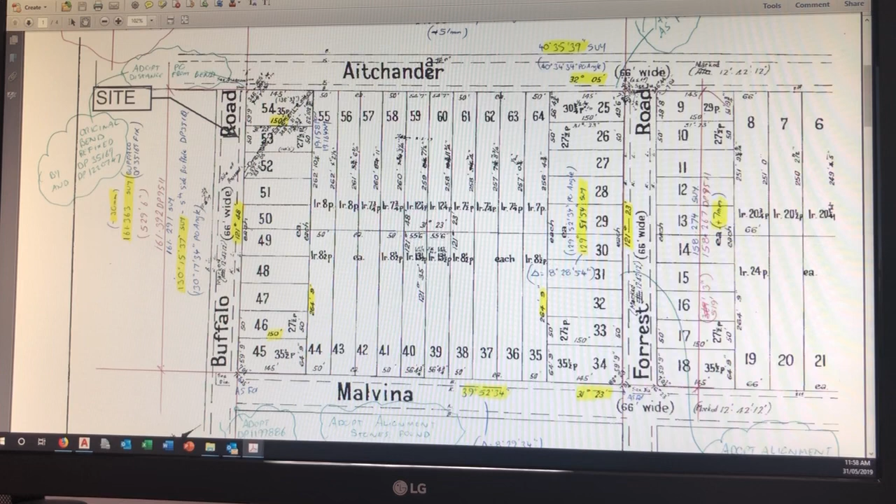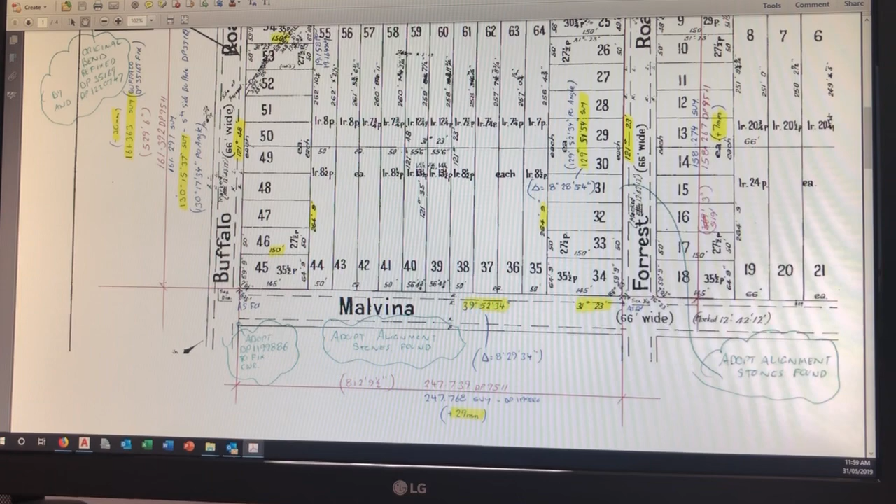Nice. And when we did a comparison from the alignment stones in Malvina up to Aitchander Street, if you look over here, we had 7 millimetres difference in distance to the original survey. When we surveyed from Forest down to Buffalo for the original alignment stone, we had 29 mil excess based on the million series plan here, but to the actual face of the stone was within 5 mil. So we've got a survey that's over 100 years old, and we're getting within 10 mil agreement to them.

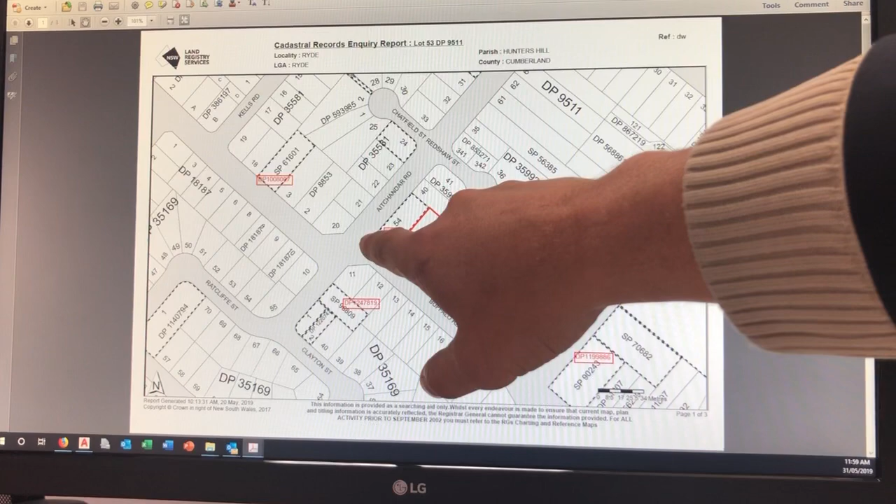Now this also just goes to why it's good to walk around and just have a look at your surroundings. You might find things, while someone's giving you plans or a search. You might imagine if we find a nail at the corner of the boundary of 50 and 49, or we find 2 concrete nails at the splay of 54. What happens if you come and find an alignment stone down here and an alignment stone around the back? It's good just to keep your wits about you.

Yeah, and the other thing we're going to bring up is generally you find million series plans, you hope you can trust them and they're great. We're just trying to say, look, that may not always be the case. This plan that's up to the northwest of us, the 100-8077 plan, it's shocking. Well, look at it, not shocking. So this is the plan that they've done.

We're on the corner on the right-hand side of the page. If you go up Aitchander, he found the alignment stone and did a lot of survey, and he's surveyed a long way. He's come down Aitchander, he's come down his property, and he's basically gone to the northwest, left-hand side, found lots of marks, lots of bends in the road. We're just looking at the Aitchander boundary. He started up the top of the screen, he's found some reference marks, found the alignment stone, pushed that bearing on.

As you come down the street, he found a peg 100mm clear, a brick wall 200mm clear, another wall 200mm clear. If we do the maths, and he's got an SSM and he's connected that into the intersection of the roads, if you do the maths from his block of land back to that SSM connection, he's 100mm long on the first dock, 170mm long here, so he's 270 long. He's then short about 150mm, so to here he's gone about just over 100mm long to the intersection.

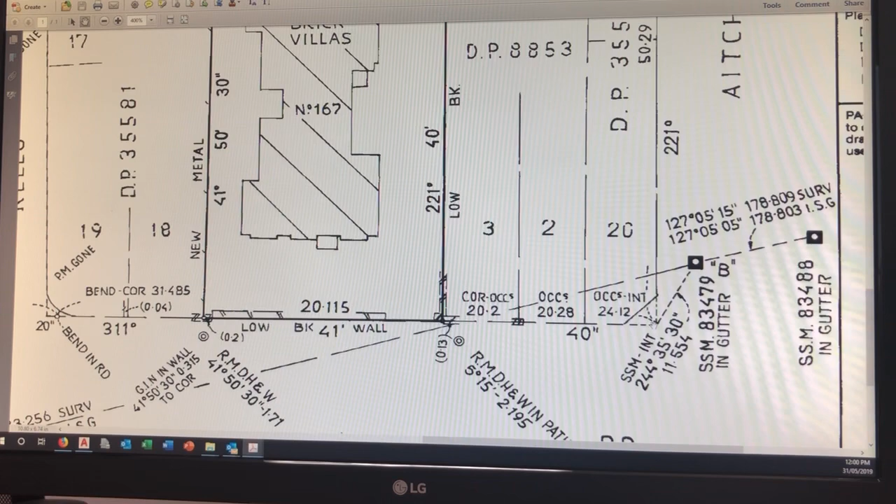If you came back title distance, that peg would be on the boundary and these occupations would be so much closer. So even though you've got a million series plan, if they've got a connection from an SSM to a corner, you can't blindly trust it. You've got to just question, what have they done? Have they done the right thing or the wrong thing? I'd hope most of the time they've done the right thing. But the important thing is to question it.

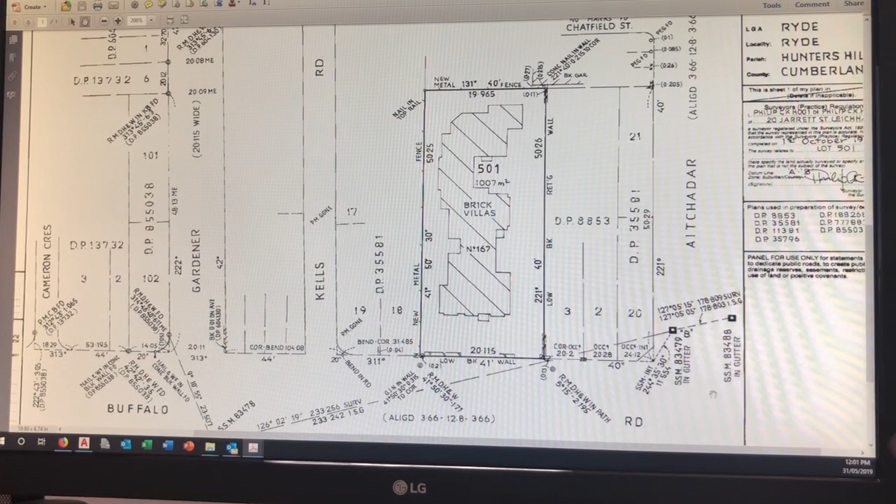So just a couple of things I want to go track back there. You said they pushed it through. So up the top here, they've come off an alignment stone, a concrete block, and a drill hole and wing. Now he hasn't come off this SSM because he's got by me, so he's used that concrete block and that drill hole and wing and this alignment stone to create a line and then pushed it through.

Now reasonably that distance there is the same as that distance there, so that's 250 metres, that's 250 metres. If that's half of it, 120 metres, so a 120 metre definition, he's then pushed that over essentially 3 times the difference. So if that's out by 30mm, or his survey of this alignment stone's out 30mm, or the concrete block's out 30mm, that makes essentially 100mm when you get down here.

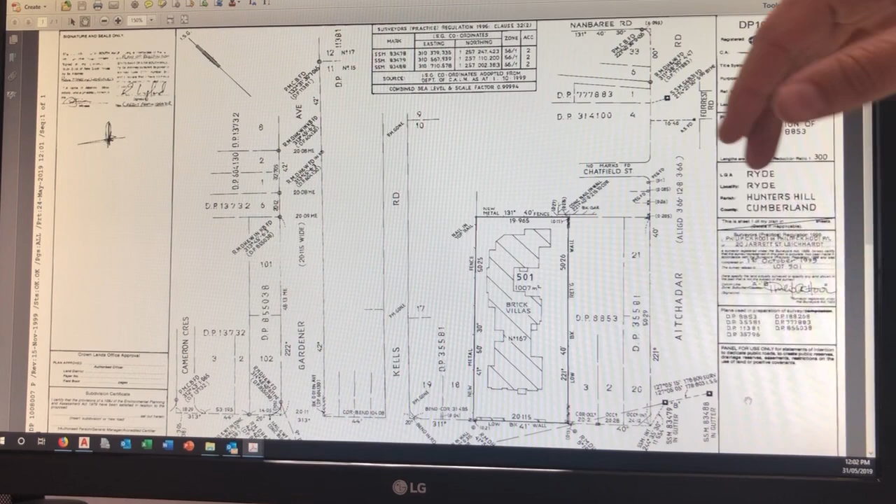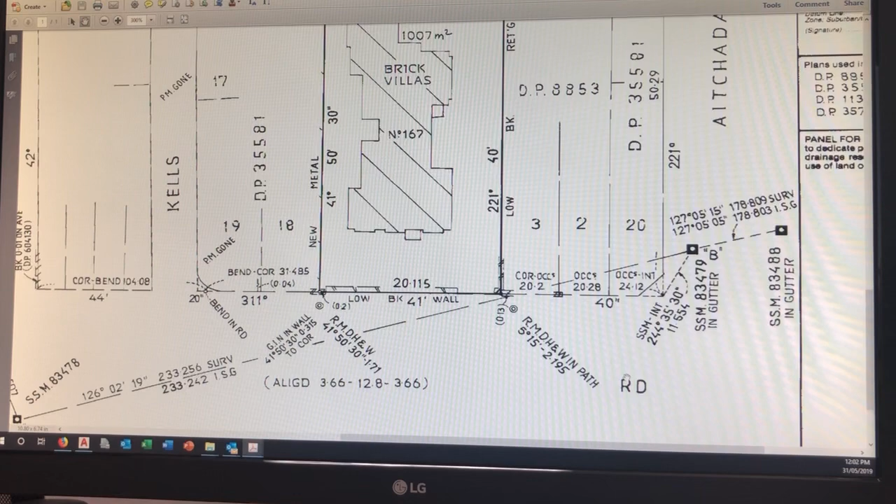So just understand that, and what I want also to point out is, see how it says SSM to intersection, he's got a bearing and distance. Underneath it, it doesn't say DP such and such. So that means it's by him. That's his connection, which is based on some OC dimensions here, as Bill said, that's about 100mm, and it's based on a fix up the top here that's based on maybe 120 metres. Now I get it that it's between 3 points, but you're pushing it then 300 and 400 metres. That just means it's a little bit dodgy.

Sorry, Bill. Yep. Oh, thanks.

Yep. So that's that plan. When we went back, we basically established back off the original plan. It all worked really, really well, but when we went to site, we did the survey of the million series and thought we're sweet. Having a bit of a look around, we picked up the alignment stone top of the page. If we had had one more setup, picked up all these alignment stones on the corner, extra half hour in the field would have saved 3 hours in the office and a second site visit.

And the main thing is, when you do these surveys, million series are great. They give us a good definition. Sometimes you just got to go back and look at how old your survey marks are in the area, and for older areas, if you can get onto the original marks, you're going to be so much more sure of what you're doing. Again, there was a problem. Our base plan had a misclose of 100mm, and it was in roughly this northwesterly direction, which basically, when we initially started the bottom corner, came up title dimension, the fences were out by 100mm. When we got back to the original alignment plans, everything worked really nicely. Yep.

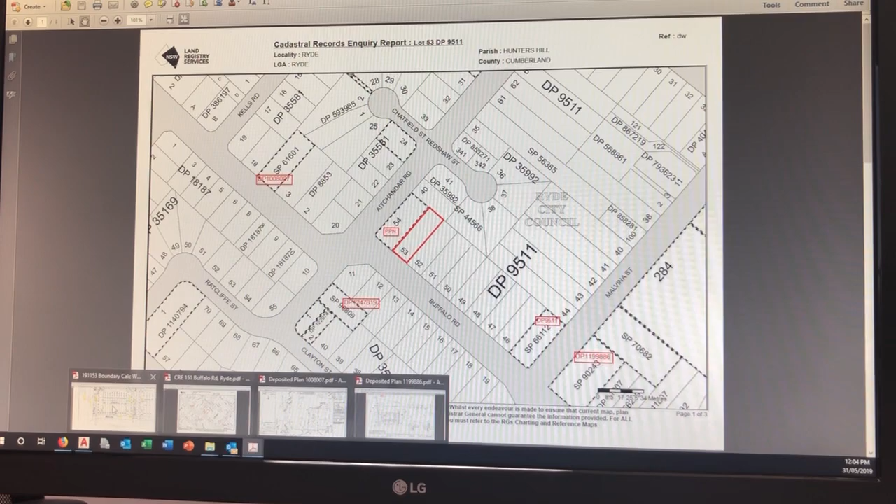And the other one I'd probably raise is, when you look at surveys, so this is a survey plan a little bit to the south of us. We're actually over on the right hand side of the page here. We've got a million series plan here. The same surveyor's done a million series next door to himself. He's found all these yellow highlighters, reference marks that he's found from the original survey. So he's found original marks. We come down to our street. He didn't actually find too much down there, but where he's working, he's fine. But you go back to the previous plan where he found these marks.

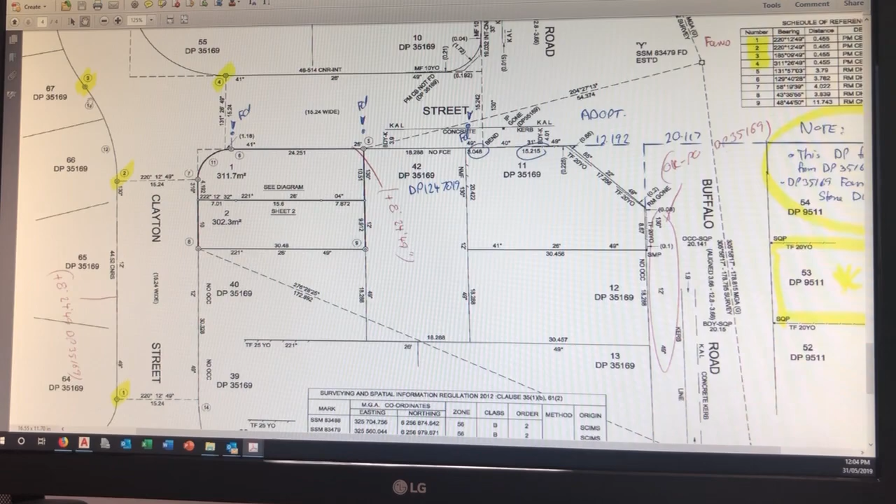So where the yellow highlighter is in the top of the page, down the bottom of the yellow marks that the Million Series plan found, this surveyor found the alignment stones to the top right of the page. He's found 3 of them. And if you go down just to the south, he's found an alignment stone here. There's actually a bend in the road there, but again, that's an original alignment stone from our survey, so we can use this plan to get back to that bend, have a really good definition up to the alignment stone in Aitchandar Street. And again, not no level of doubt, but we've got original connection to original marks that defined our street boundary, and we're laughing from a fixed point of view.

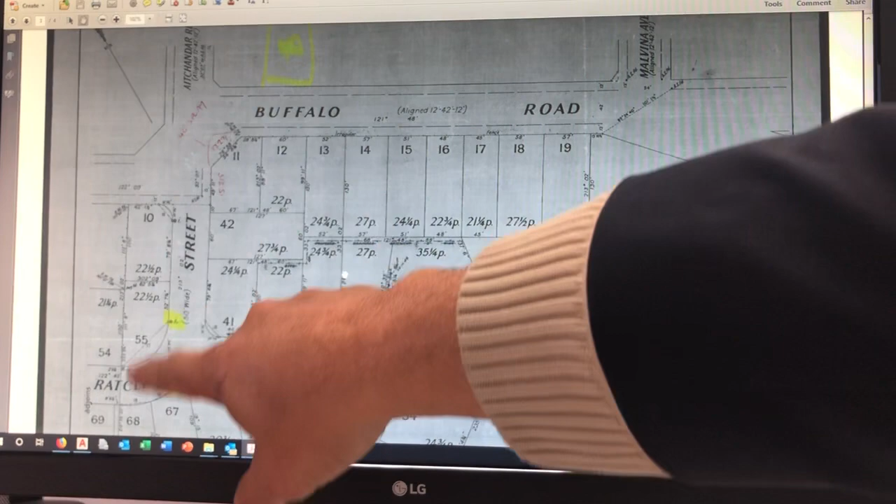So by understanding how he's defined his fix for this subdivision, we can use these marks with a level of confidence. Yeah, exactly.